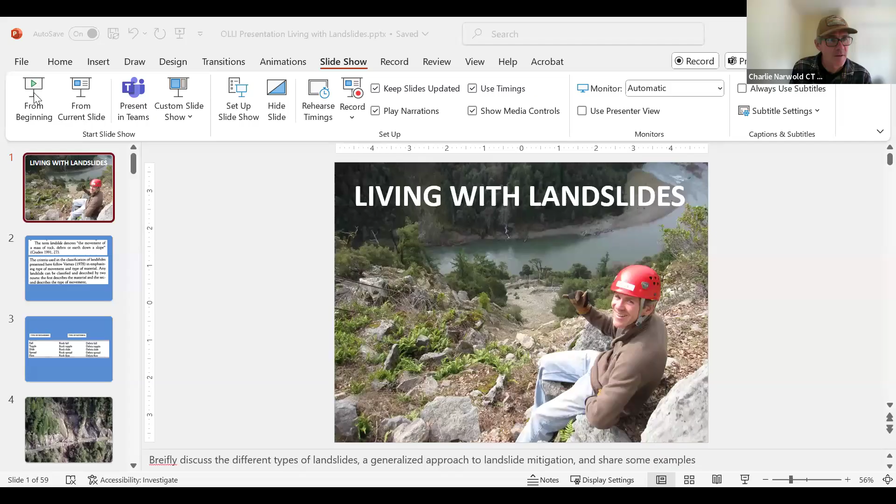Good morning, everyone. See if I can get through the first hurdle here of sharing my PowerPoint presentation. So let's see if we can do that with ease here. So I'm going to share. Give me one moment, please. So let's see. Give me 1 second and share. And let's go here. All right. Does everybody see that? You got it. All right. Whew. That's the hardest part, right? Yeah, we always ask everybody to come on board early so we can make sure the technology is working, because often it's an issue. And Charlie welcomes questions and you can put them in the chat or obviously raise your hand. I will be monitoring the chat. Yeah, feel free to interrupt as needed. Okay.

Well, welcome everybody. Certainly enjoy this opportunity to share some information about landslides here on the North Coast. Some of us are more familiar with landslides than others, but certainly you hear it in the news, and anybody that lives on the North Coast at some point has probably been impacted by a road closure or delays related to landslides. So it seems like it's relevant to folks that live here on the North Coast.

Yeah, and the point in all this is for hopefully people that sit in on this today to learn something. So feel free. I'd like to keep it informal. Feel free to interject. You could just interrupt me. I don't mind. But if you'd rather use the chat, it sounds like Jane might be monitoring that, and she can interject when there's a pause or when appropriate. Yeah, again, I want to keep it informal. I might have to pause a few times. I had the crud last week, so I'm still getting over that. You might hear it in my voice, so I apologize if I have to pause and drink some water every now and again. But I'm glad I was able to participate today.

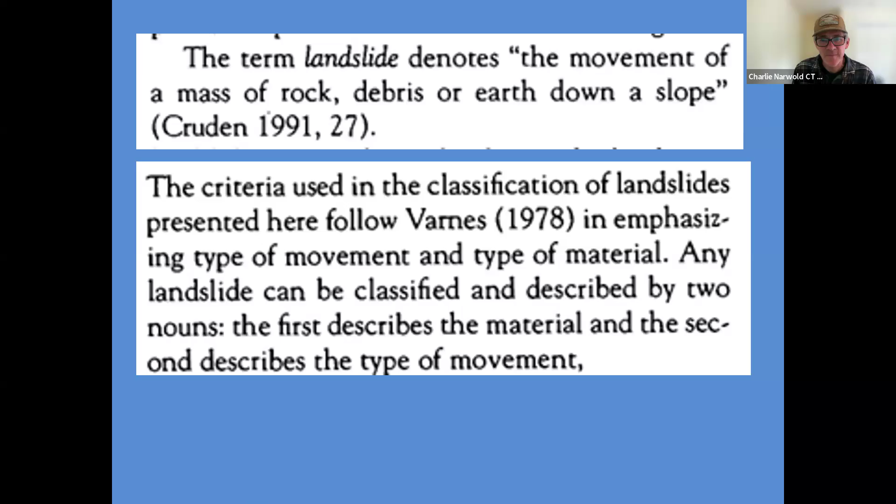Varnes, 1978, came up with one of the more simple classification schemes for landslides. Any landslide can be classified and described by two nouns. The first describes the material, and the second describes the type of movement. So, pretty simple stuff. There are some very sophisticated landslide classification schemes, but in simplest terms, we typically describe them in terms of the type of movement. So is it a fall? Is it a topple? And I'll give examples of each of these: a slide, a spread, or a flow.

So a fall is, if you can imagine a rock comes bounding down the hillside, we call that rock fall. It's falling through the air, and it might intercept the ground surface as it bounces down the hillside. Topple is when you might have rock that is fractured vertically, and there's what's called an overturning moment where the material is actually falling in rotation, and they call that topple. We don't see that very often. That typically happens in rock.

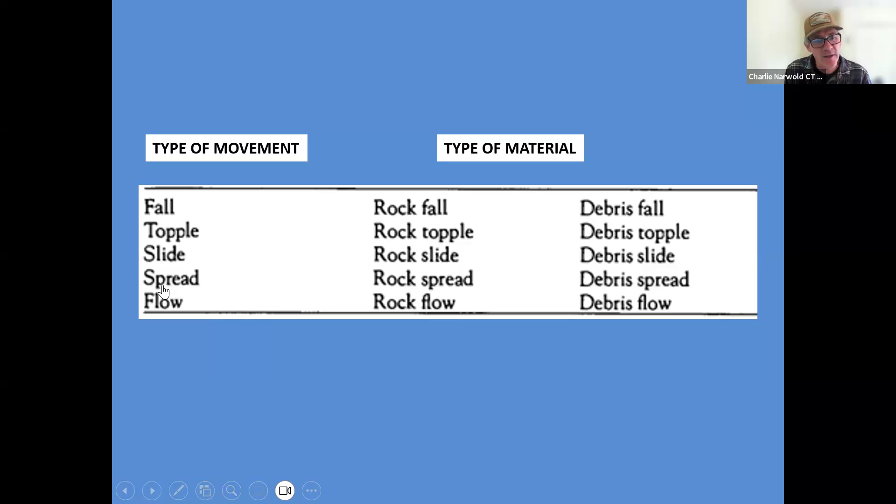Slide, I think, is pretty self-evident. We have a lot of slides in this part of the world, where literally the rock or soil is sliding on some failure surface. That might be the one that people are most familiar with. Spreads are typically where the failure surface of the landslide is very gently dipping or almost flat. Sometimes these happen during earthquakes in saturated material where the land, due to groundwater and other forces, can spread essentially in more of a horizontal sense.

In flow, we also get debris flows in this part of the world, and that's what you often see occurring in Southern California during large atmospheric rivers, where you see these torrents of debris and mud that come flowing through canyons, and they oftentimes occur in recently burned areas. So nothing fancy: the first term is type of movement: fall, topple, slide, spread, flow.

And then just very generally speaking, in this simple classification, is it rock or is it debris? So if it's predominantly rock, you might call it a rock fall or a rock slide. And if it's debris, which again tends to be a combination of both fine grain and coarse material, which is pretty common up in this part of the world. Oftentimes the landslides are comprised of not only soil, but they incorporate a lot of larger boulders in these landslide bodies, and we call that debris.

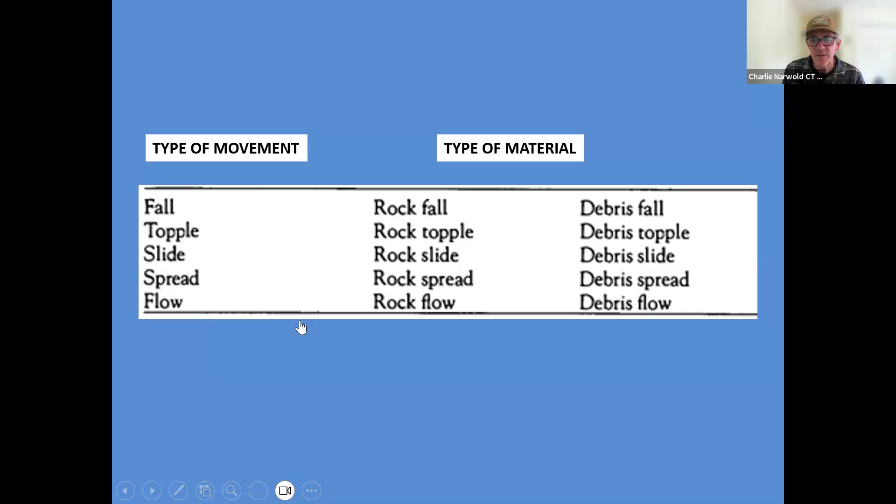So you can get debris slides and debris flows. And so I'd say the ones that we're probably most accustomed to seeing up here are rock falls and rock slides. And then on the debris side, we have debris slides and debris flows, and I'll share some examples. So I was going to try to set this up where we could do a show of hands and do a quiz, but I was pressed for time, so I'll just walk you through these.

And why is this important? At least when you're in the industry and it's your job to mitigate landslides. Because words have meaning. So I think it's important if I was to receive a call from one of our field maintenance people or somebody on my own staff, and they say, Charlie, highway's closed, we have a debris slide. So it's important that I understand the circumstances. And so when somebody says debris slide, I immediately can associate that with the actual landslide. Or if they say, hey, we've got a debris flow, then that has a whole different implication.

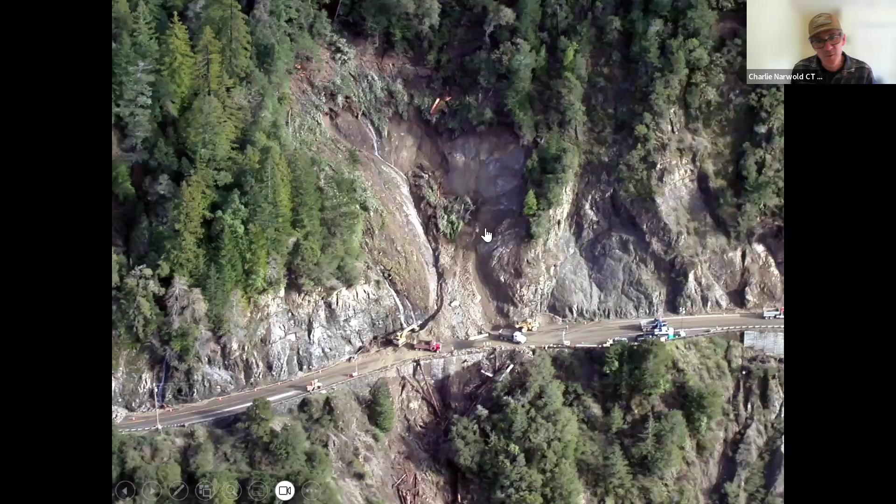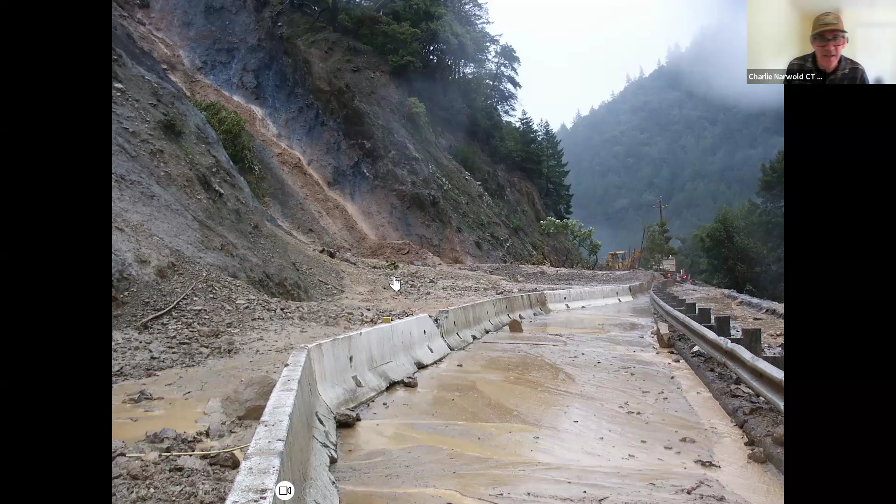So this looks a little different. This is kind of more of a soupy mess. These can be really challenging to deal with. It's kind of a little different beast, as I like to refer to these landslides as beasts that we have to deal with. So this is what we would call more of a debris flow. Some people call these mudslides, but this is where we do have some rock, but this is predominantly finer grain material that's saturated and it flows and it's coming down this. This is out on Highway 96, again, out near Orleans, but this is what we would call a debris flow.

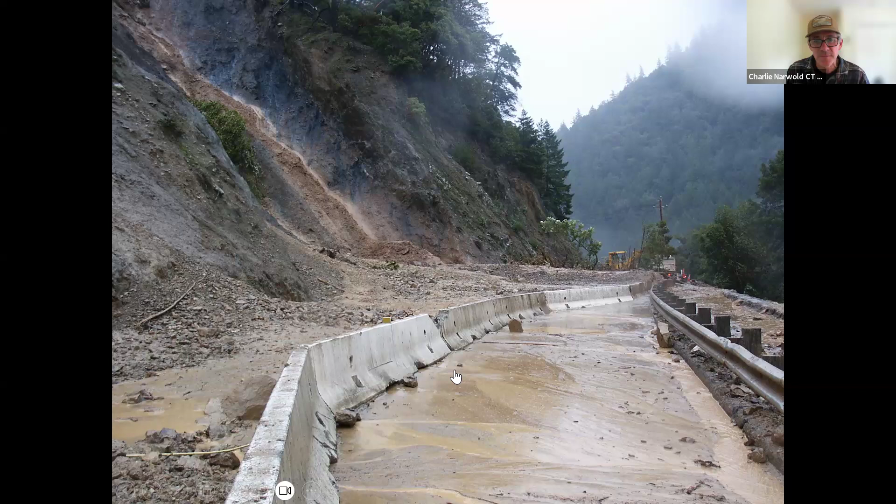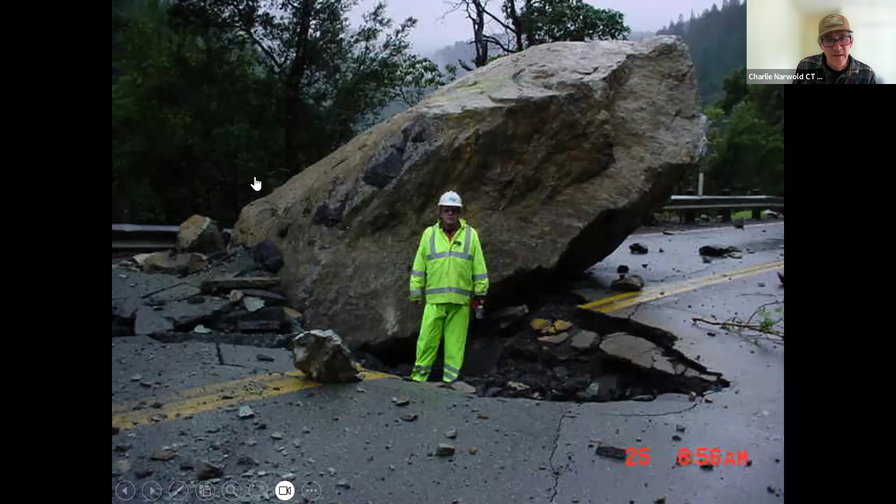It might just help people to understand what those terms mean, and that's kind of what they look like. So this is just a typical block diagram. I might be using some terms that people aren't familiar with. And one size does not fit all. As you can see, there's quite a broad range of situations I just showed, from that rock fall with the large rock in the middle of the lane versus the debris flow, which covered the highway with mud. But I just thought it might help, because we're all trying to learn something new here, hopefully, or learn something that we've already heard in the past.

Oftentimes we refer to landslides as having a head scarp or a main scarp. That's typically where the landslide starts at the top. There's some displacement of the earth that usually results in a large oversteepened scarp at the top. And what the landslide is sliding on or flowing on, we usually refer to as a rupture surface or the landslide failure surface. So oftentimes you might hear me talk about the depth below the ground surface to this landslide failure surface. And sometimes you get intermediate or minor scarps.

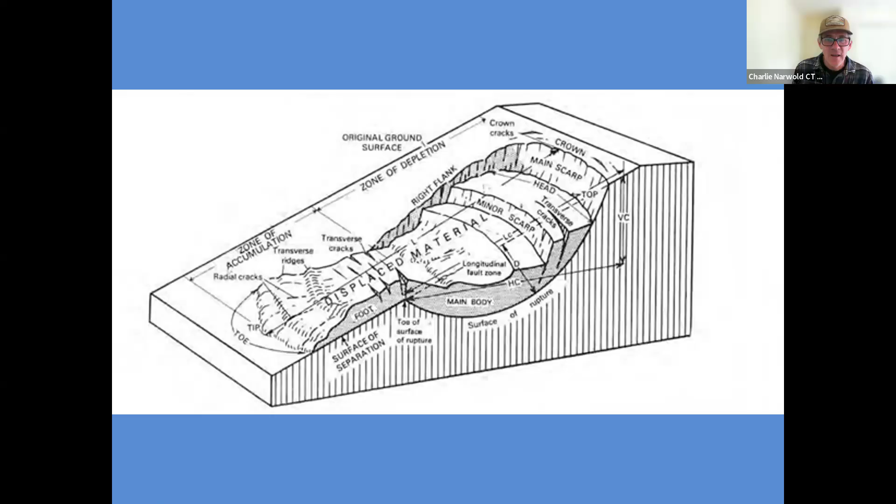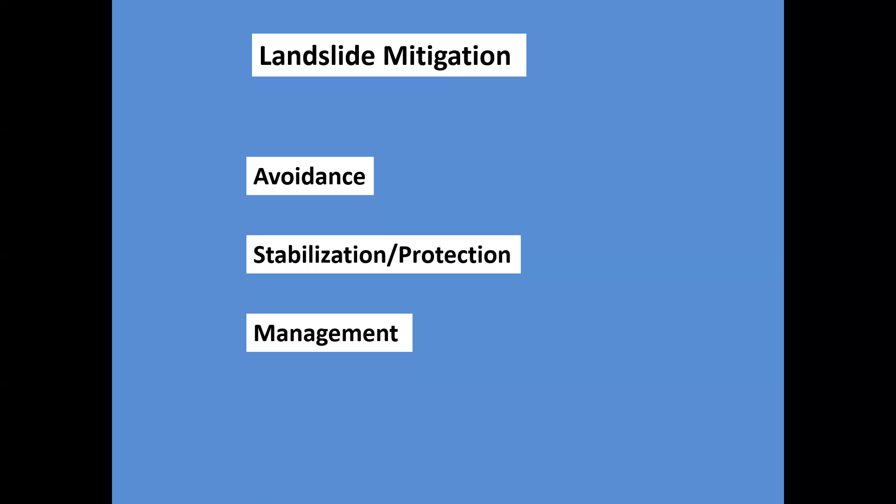I like to tell the story that oftentimes I'll show up on a job site, often when the highway is closed, and either the road has been taken out by a landslide below the highway, or it's completely buried the highway, or it started above, took out the highway, and continued all the way to the river. People are concerned and anxious to figure out what we're going to do. The first thing they say is, "So what are we going to do?" And I always say, "I don't know, I just got here." It usually takes some investigation.

I've been working up here in District 1 for the last 20 years. District 1 is Humboldt, Del Norte, Mendocino, and Lake counties, so that's our jurisdiction, and we get a lot of action in those 4 counties. So the first question is, well, what are we going to do? A landslide occurs, it has impacted our infrastructure, so what are we going to do?

Some people might think it's really complex, and every landslide is different and has its own unique set of challenges. But in order to simplify it, I typically start by telling people we like to approach these in terms of avoidance, stabilization, protection in the realm of rockfall, and then management. It can be overwhelming, but if you start broadly, then you can narrow down your options. We're going to talk about each of these and I'll give some examples.

So what is avoidance? That's usually going to be your best option in most cases. It's usually the most expensive and has the most impacts. But if it's a real bad actor landslide, avoidance is a really great approach. So this is an example in Mendocino County, and this is a great example of avoidance.

This is an aerial view of the South Fork Eel River, and this is where Highway 101 used to be at Confusion Hill, which I'm sure most folks on this call are familiar with if they've lived here prior to around 2005. This was a stretch of Highway 101 that has a large landslide complex.

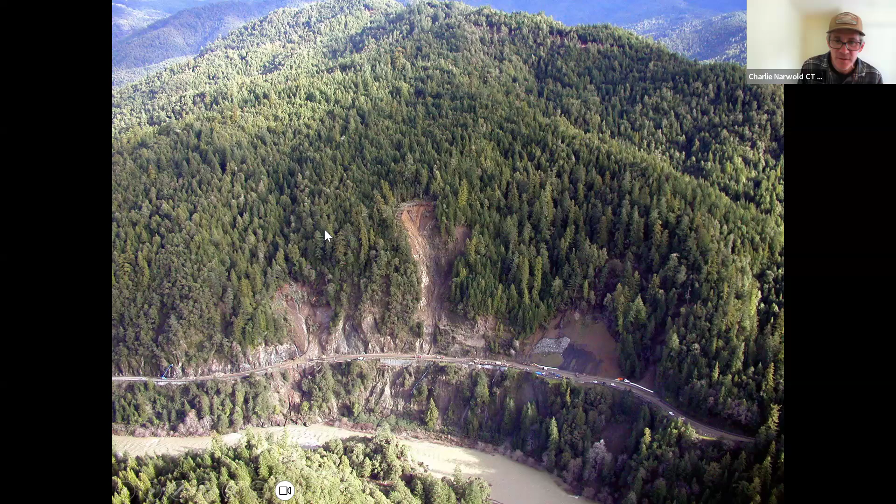Oh, and here's just a picture. This was common at Confusion Hill for many years. We'd have this K rail in place, and these are posts of a rockfall fence that got bent over. You can see one of these shower curtains, as I like to refer to them, what we call a cable drape, which is a big heavy cable drape that's draped over the slope to try to mitigate rockfall coming off

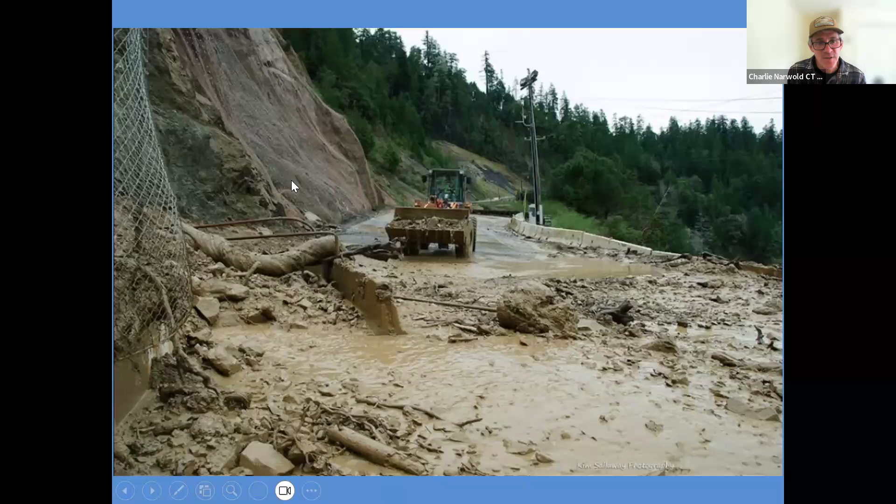the hillside above. So despite our best efforts, protection measures, it wasn't futile, but usually they would be overwhelmed, and this was a common occurrence. And so stabilization and protection along the existing alignment just wasn't really an alternative. So Caltrans decided, with the help of Federal Highways, that it was time to find a long-term solution to Confusion Hill.

So we had a giant landslide that caused us all kinds of grief. I can't tell you how many times myself and my family and probably all of you got stranded on one side of this trying to get to the Bay Area over the holidays to go catch a flight or visit family or coming back from a trip, and you'd end up having to go through Bell Springs Road on some awful detour in the middle of the winter.

So this is just a classic example of avoidance. We had a landslide that was causing us a tremendous amount of grief. It cost an enormous amount of money, and there were also the safety concerns to maintain this section of highway. And the decision, which was not an easy one, and it took decades to develop this mitigation strategy, was avoidance. So there's a great example of avoidance.

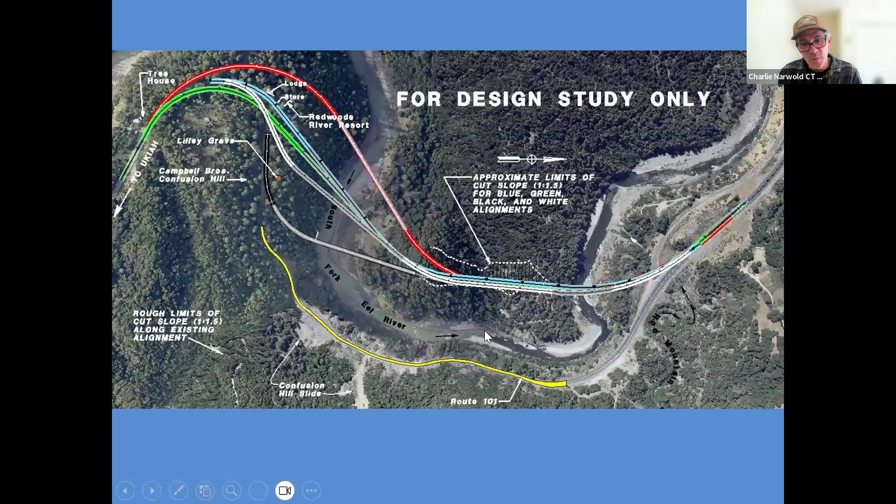So this avoidance measure was designed and built, I think we started in 2006, and it took about 3 or 4 years to complete. But here we are in 2025, and we're talking about doing a bypass, avoiding the Last Chance Grade landslide. And that's supposed to go to construction, I believe, in 2030. So history repeats itself.

And Jane, I'm not looking at the chat, but does anybody have any questions at this point? Yeah, John Clark mentioned they moved here 18 months ago around Elk River Road.

They're on a very steep hill with sheer slides. Is there an entity that could evaluate the chances of a landslide and recommend mitigation? In other words, does the state do that? Do you do that? Yeah.

So Elk River Road, I believe that's probably outside of Eureka city limits, but it's probably within Humboldt County jurisdiction. I'm just guessing, but I was just out there for a mountain bike race this past weekend, out on Elk River Road. And I'm guessing that falls under the jurisdiction of Humboldt County Maintenance.

And they certainly have some battle-hardened people that work for the roads department for Humboldt County in terms of being proactive and being able to do an evaluation and come up with slope stabilization measures. I know, as we all probably live here in terms of paying our taxes, that a lot of their funds come from tax revenue, so they're pretty strapped for funding.

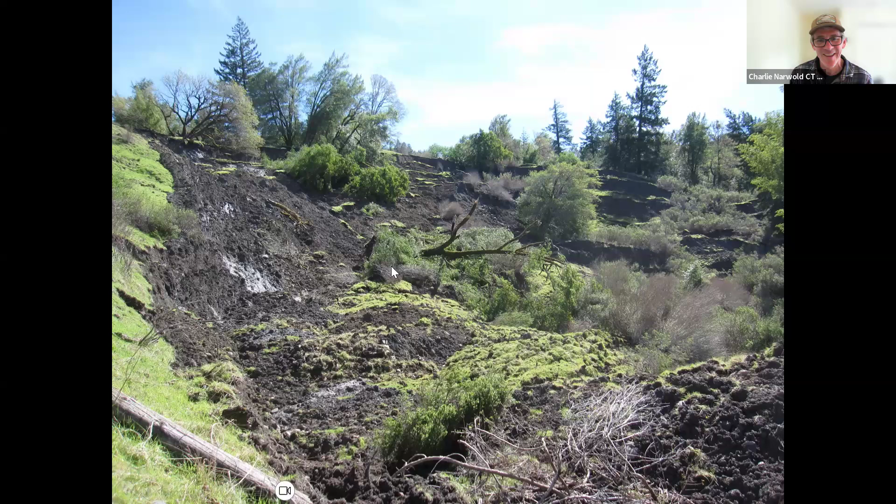And so the idea, and this is just what it's shown on paper, is that we were going to excavate the toe of the landslide, and then we were going to dig below the failure surface, and we were going to put back material, essentially rock, and we were going to compact that material to where this kind of trapezoidal shaped piece of real estate that we were going to build was going to basically hold back, or what we would call a buttress.

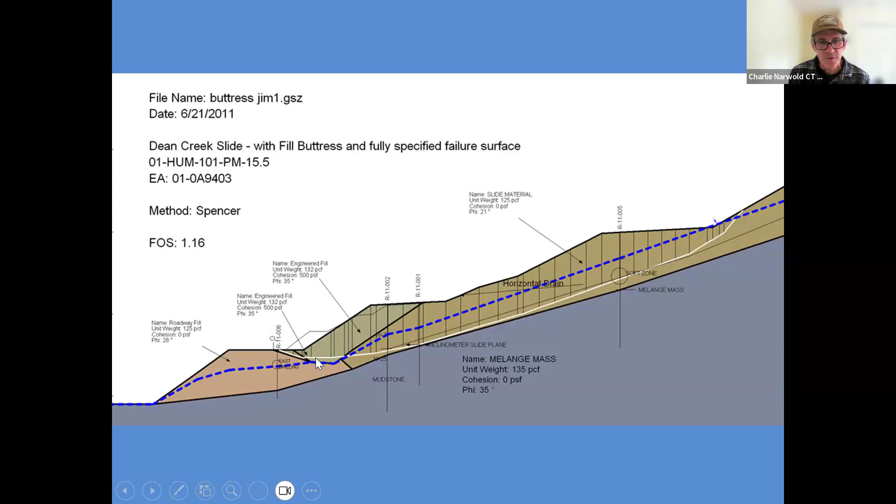We were going to buttress the landslide. And so that was the idea here. This is a zoomed in portion. So here's this buttress, and we'll see some pictures of that. So that's just kind of that area zoomed in.

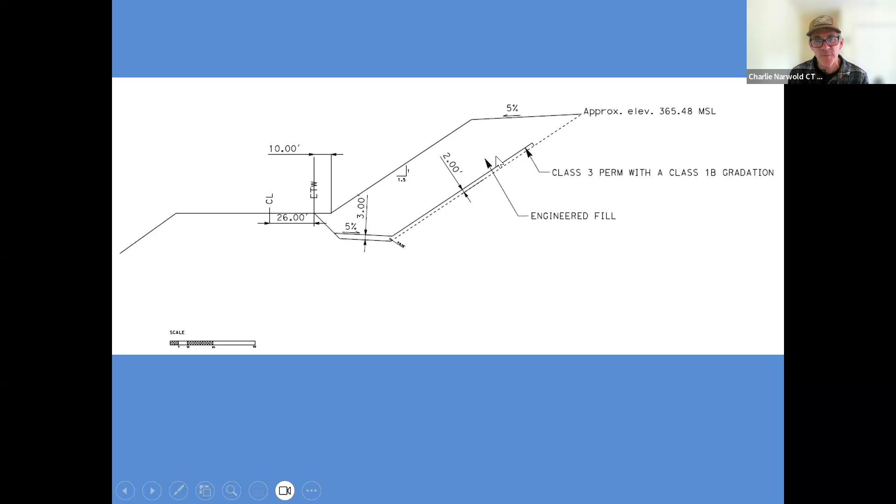So we were going to come in with a contractor. We're going to excavate the toe of the material, and we use the expression keyed in below the failure surface. So this will be below the landslide failure surface. And essentially this, in conjunction with some dewatering of the landslide, was going to, at least based on our slope stability analysis, stabilize this landslide.

So here's the big hole in the ground. Now we've got our backs to the hillside, we're looking out towards the river. And this is the excavation that we performed. And the idea was that we would put back heavier material that was more dense, because of its engineering properties, had enough strength that it would buttress the landslide.

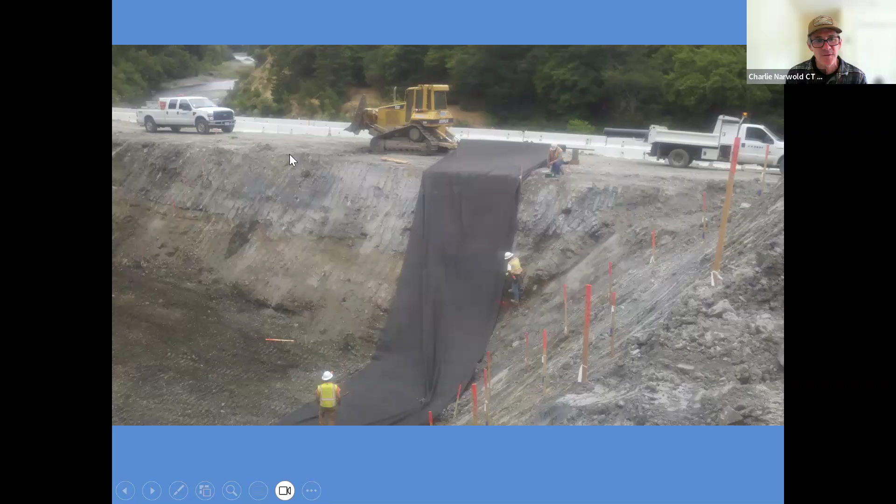So here we are now looking to the north, the highway's on the left, the landslide that we saw in that aerial photo goes up the hillside on the right. And we're bringing in this crushed rock material, which is heavier and stronger than the landslide material, and therefore would afford us this ability to buttress the landslide.

One thing that I'll say is that when we dug this excavation, the landslide actually accelerated, which we expected. So we ended up working two 12-hour shifts, or the contractor did, and this was all monitored, meaning we had real-time monitoring, and we knew the depth of the failure surface. And once we excavated below it, we saw an acceleration in the rate of the movement of the landslide.

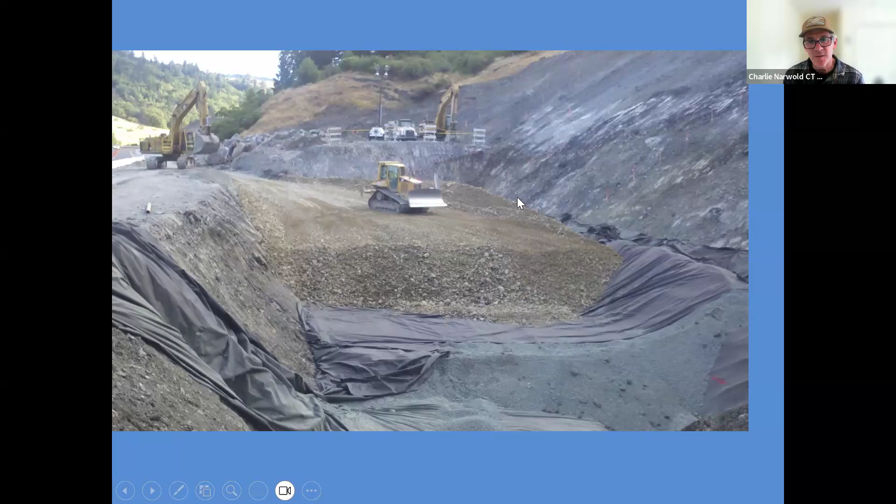And that's when we went to this 24/7 operation and promptly put this material back as fast as we could, because we didn't want the landslide to fail into the excavation, due to contractor safety. But once we piled this material back up, the landslide stopped. There was a little bit of excitement.

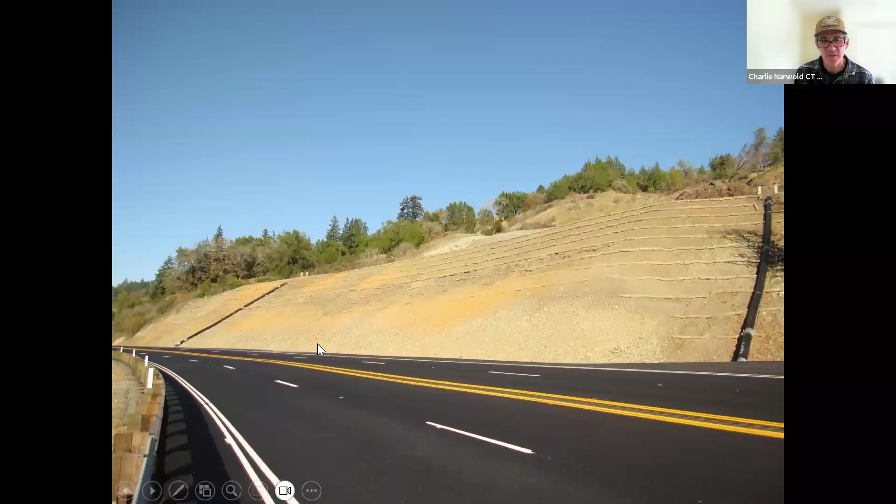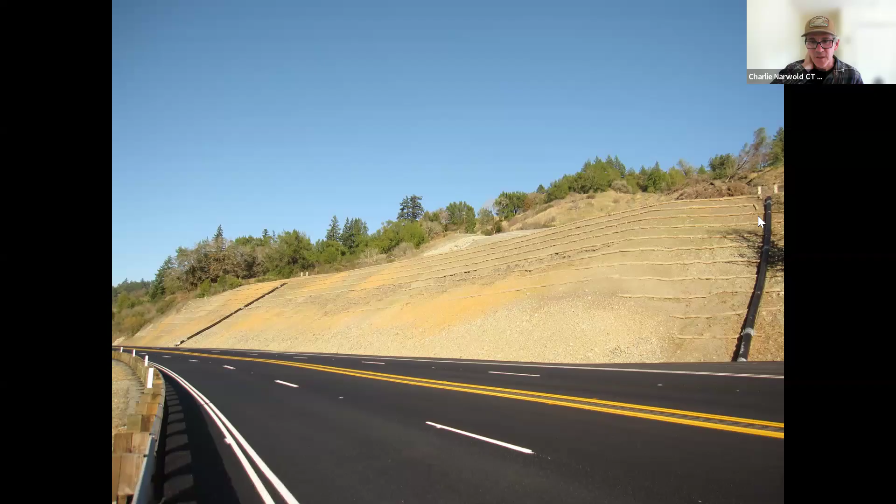Yeah, so this is this big buttress. So now people probably whiz by this 4-lane section, and hopefully not on their cell phones. They're doing 65 and they don't even know this is here, but this big, kind of inconspicuous mass is a buttress that's holding back that landslide. So that's an example of stabilization.

And let's see, 12:50. I think we're doing pretty well here. So drink a little water. You have until 1:30, Charlie. Yeah. But there are a couple of questions.

Where is the material removed from the landslide taken is one, and have you adopted quadcopter drones for surveillance? And could you talk about sinkholes? That's 3 different questions. Sure. So the first one was, where do you haul the material? Yeah. Anywhere we can.

That can be an enormous challenge, and it can be an enormous expense. And in this part of the world, you need to really look carefully at our disposal sites, because when you start moving hundreds or thousands or tens of thousands of cubic yards, in the case of Confusion Hill, which was about 500,000 cubic yards, when you try to find a home for that, you have to make sure it's in a stable location so that you don't create new landslides or instabilities as a result of placing it somewhere else that's potentially unstable.

So we work with private property owners. Sometimes depending on the nature of the construction contract, it becomes the property of the contractor. So it might sound like I was being a little flippant when I said anywhere we can take it, but literally, sometimes if it's rocky material, the private timber industry is interested in it because they can reduce it in size and use it to rock their logging roads.

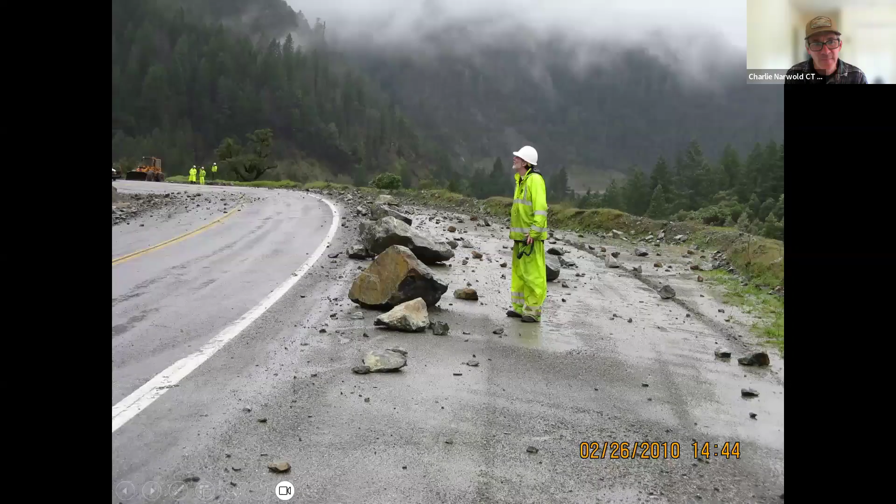So I'm going to take you back to Highway 96. That's definitely a tough neighborhood out there. So this was an existing cut slope, a slope that had been excavated to build the original highway. Maintenance started noticing not a little bit of rock, but a lot of rock on the highway. Pretty significant. And here's a picture of what the inboard ditch looked like. So, major safety issue, right? So not a good situation. I don't expect everybody to read all this, but I'll just run through it quickly. It was really more for me, but basically,

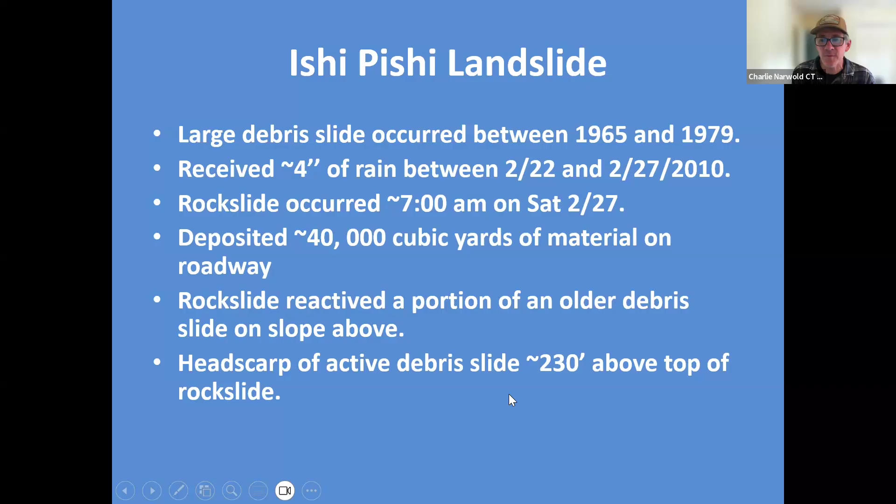we received 4 inches of rain in about 5 days back in 2010. And then we had a rock slide occur around 7 a.m. on a Saturday morning, and it deposited about 40,000 cubic yards of material on the roadway. And then the rock slide reactivated, meaning there was an older landslide above it that became active as a result of this. And the headscarp of this other slide was 230 feet above the rock slide. So this was, again, show up and what are we going to do? It's like, I don't know. It's a tough one.

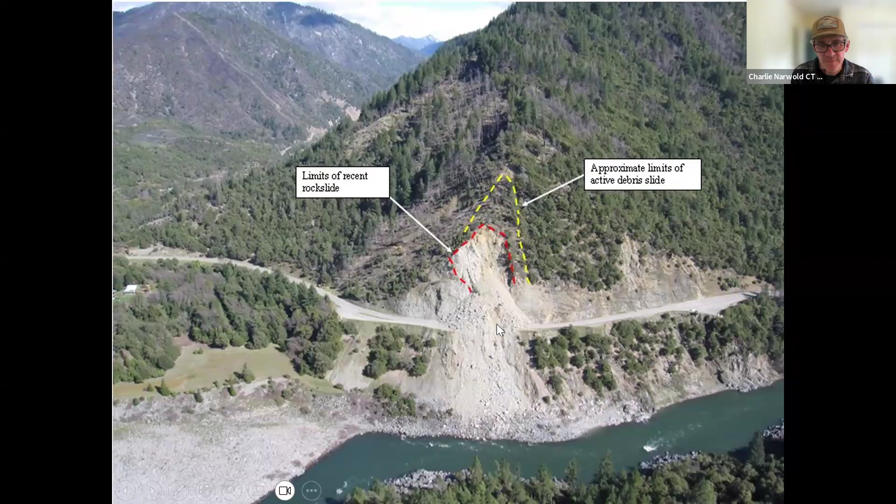And this is just zoomed in. I think I've referred a couple times to the headscarp. So this oversteepened area here, this white, there was an existing scarp there, and as a result of the rock slide in red, a portion of this older landslide reactivated.

So, long story short, we monitored that slope for a long time and convinced ourselves based on the data that the landslide above the rock slide had really moved in response to the rock slide, and this was now stable, but we still had this pile of rock on the roadway and this steep, recently failed slope to contend with.

There were also some cultural considerations. This is out on Highway 96, so there were some cultural considerations. We had this marginally stable piece of real estate on the hillside above. We weren't going to build two bridges to go onto the opposite side of the river. It just wasn't possible at this location. So stabilization was probably not really an option, nor was avoidance.

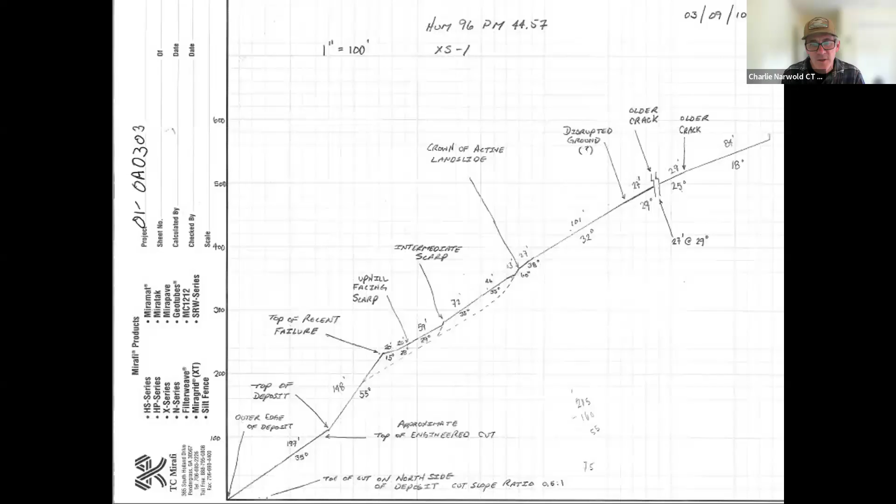And you can appreciate, this is some pretty tough terrain here, and this is not something you want to be running traffic under. So that's a cross section, which I'll skip for now. But we monitored the site.

We also use survey prisms. So we actually monitored this slope during all these activities because we didn't want anybody out there working underneath this slope if it was potentially still active. I didn't really touch on that today, but there's all these things that we have to do to ensure the contractor's safety to try to mitigate these landslides. So we had monitoring survey points that we could read from the opposite side of the river with a total station.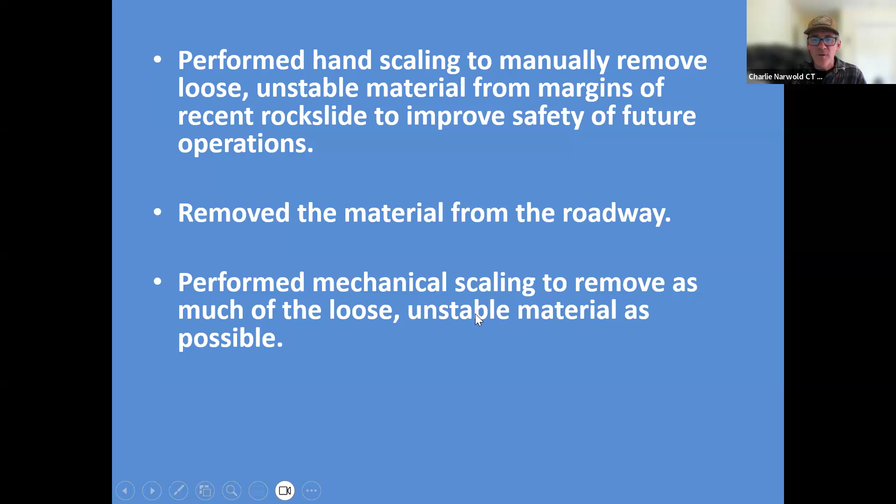But we decided that the best approach would be to remove as much of the loose, unstable material as we could, remove the material from the roadway, but we were still going to have a rockfall issue, so we needed some protection. So this is what's called hand scaling. So we hired a specialty contractor that actually went out and removed some of these rocks by hand, believe it or not. Here you can see some vehicles down here on the road for scale.

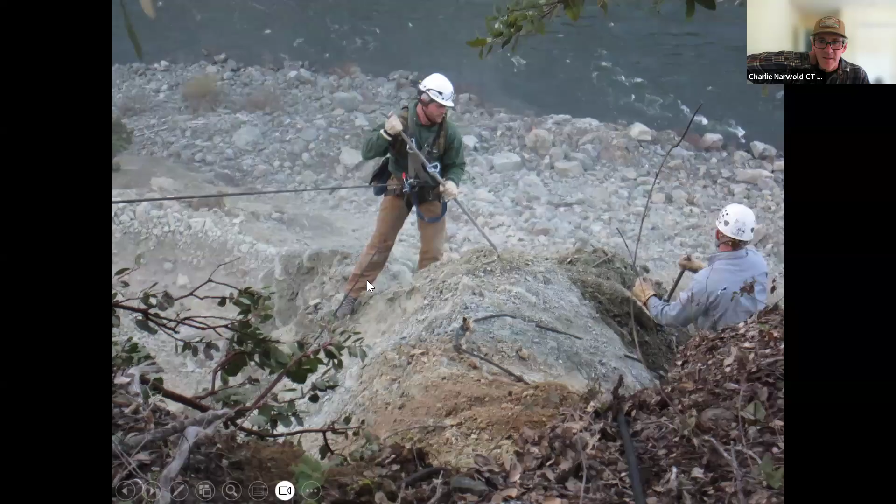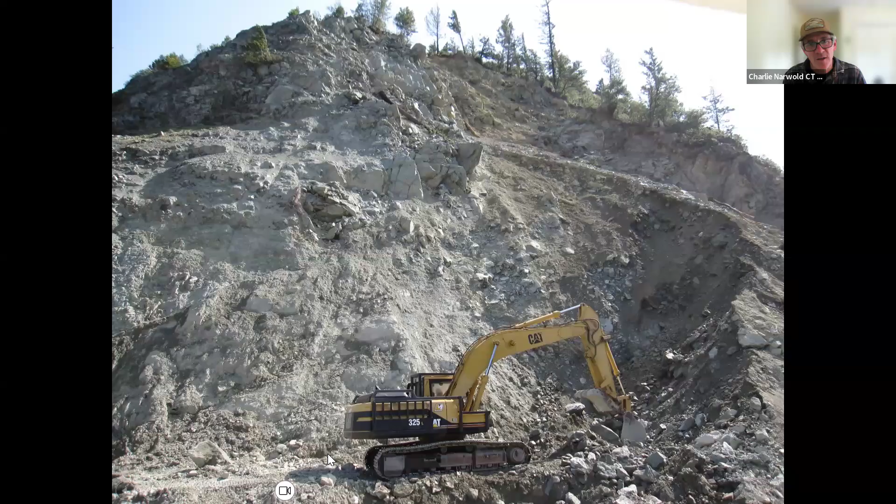So yeah, this outfit that we hired specialized in what's called hand scaling. It's very labor intensive and very time consuming, and it's dangerous, but we take precautions. So there's hand scaling. We remove the material from the roadway using excavators, but you can see how ugly this slope is still above the highway. More material on the road.

So we actually used a logging technique, using an excavator and cables to drag what we call the shark up and down the face of the slope. So this is an I-beam that's made out of steel with a bunch of teeth that are welded to it. And I'm just demonstrating this so you can see that there's a whole system of cables, using a yarder from the logging industry, for people that might have been loggers.

And we literally dragged the shark back and forth and kind of raked it across this slope. And this is what came down as a result. So we're trying to basically remove as much of the unstable material as possible. So when we were done with the hand scaling and excavating the material at the roadway and using the shark, this is what it looked like.

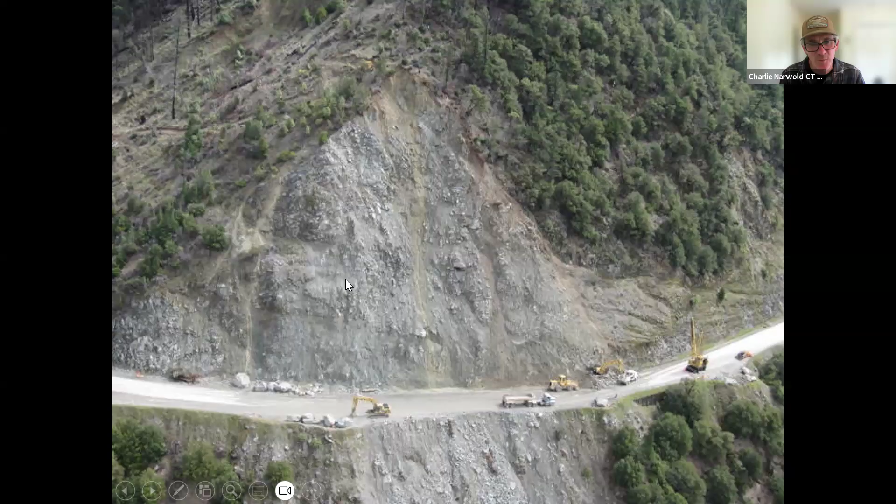So we decided we were going to go with what we call protection. And that's really what this example I wanted to share is, that we did take steps to stabilize the slope as best we could, but really the main point was that we were going to protect it. And this is what I call these shower curtains. So we have what we call a cable mesh, which is like a shower curtain that we place over the slope, and then it's suspended by, in this case, suspenders and cable anchors at the top.

And then as rockfall is generated behind this, it is conveyed below or behind that shower curtain, and it controls the trajectory and the velocity and the energy of that rockfall to where it can be managed at the roadway level. It gets spit out behind some K-rail, and I'll show you a picture of that. So this was our idea.

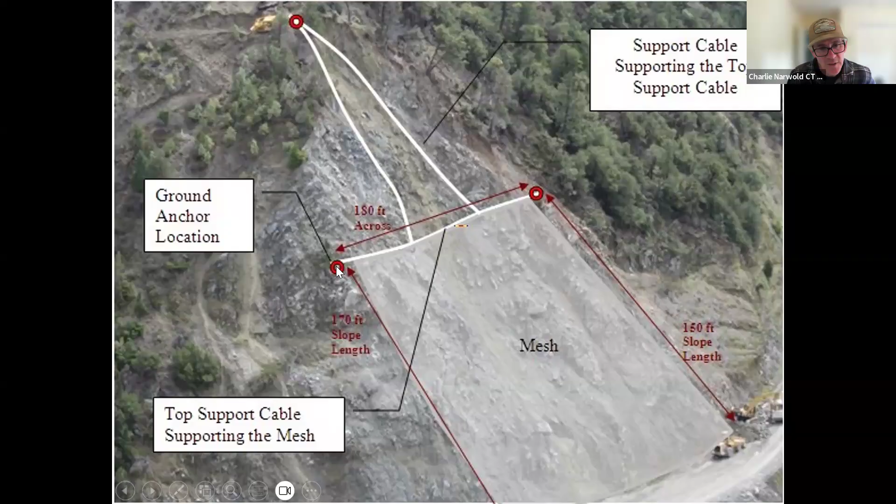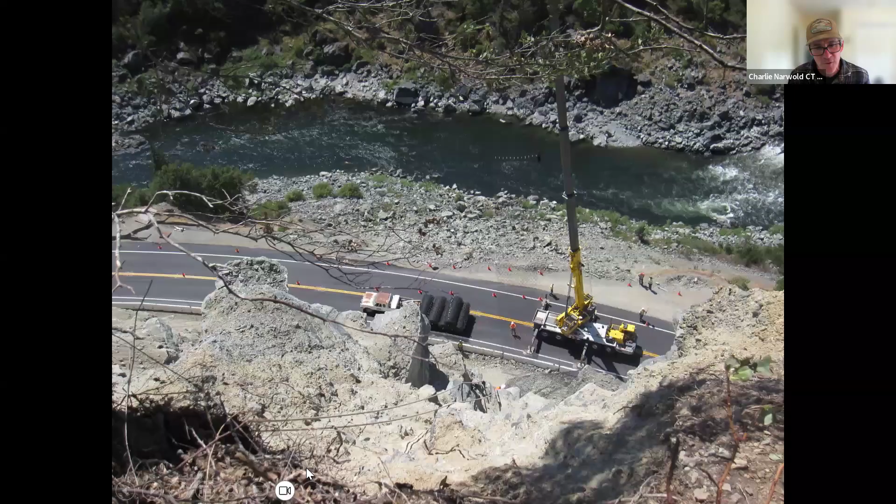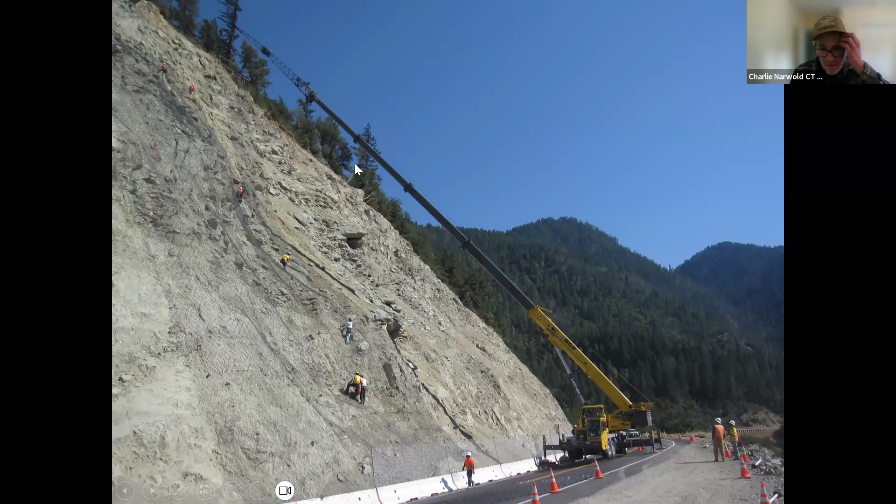So this is a view from the top looking down. Here's a view from the roadway looking back up. They're hanging these panels, and then there's people that rappel down and stitch these panels together with lacing cable. So we have a nice big continuous, there's another picture, but you can imagine the expense and the effort to do this work. And then when we're all done, the lower portion of this slope is covered with this cable net drapery system.

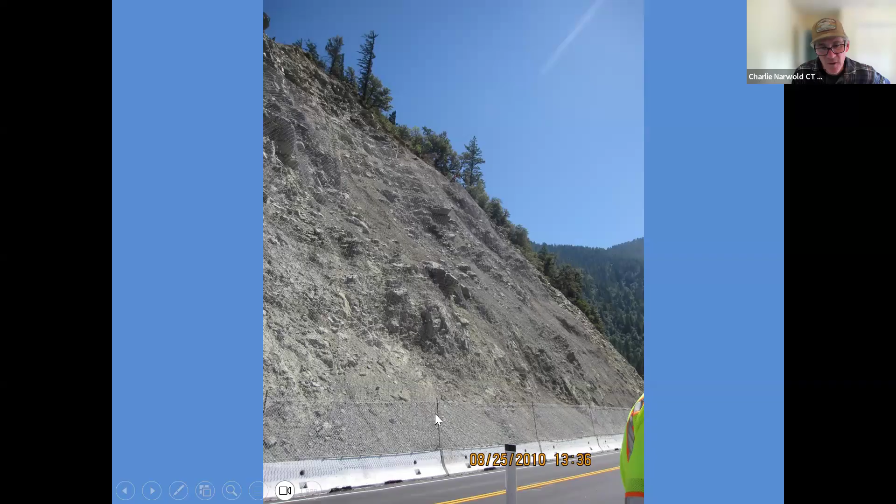And then we have K-rail at the toe, some people call them Jersey barriers, but it's this steel concrete barrier. And then we have what we call a little catch fence. And periodically maintenance comes over, and we have a little mini excavator that crawls around behind here and loads the stuff out. But that was an example of protection.

Oh, and I guess I got one more. Management. Did I? I guess I didn't. How much time I got? Well, just keep going as long as people want to hear you, you can keep going. Okay, yeah, well, here you go.

So management. I guess I forgot about management. So management: sometimes with landslides, we can't avoid it. It's really not feasible to stabilize. And in some cases, it's really hard to protect. So what do you do in those situations? It's still our responsibility to keep the highway open in a safe manner. Sometimes it's a combination of stabilization, protection, and avoidance, but we're actively managing a site.

And so this is out on Highway 36. This picture was just taken recently from a drone. Somebody asked about drones earlier. Some of you may be familiar with this landslide. It's about post mile 15, before Bridgeville, but this is a menace. It's very long in terms of the slope length.

It's very steep. And what you don't see in this photo is that the headscarp, remember the pictures I was showing you about the headscarp, is well up into these trees. And the concern is that if we came out here and tried to remove this loose material, it's so steep that we would just undermine or destabilize the hillside above. So we're very concerned about trying to remove the failed material of this landslide.

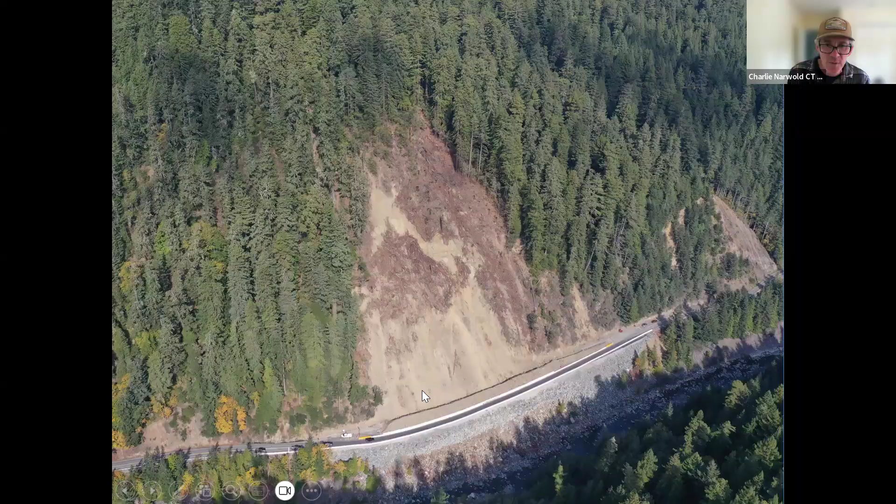So this is avoidance. We're basically trying to avoid the problem by realigning the highway, and then we're trying to protect the highway by building what we call a large earthen berm. Let's see if I got a picture of that. So here's a cross-sectional view. You have the river on the left, landslide on the right.

The highway used to be, you see where this yellow tree is in the center of the photo, right at the base of the slope. So it was probably 30 to 40 feet further to the right. And so anytime material came off this slope, it was immediately into the roadway. So we basically realigned the highway towards the river, pushed a single lane out towards the river, and built this large earthen berm using the materials that we have on hand.

And so this was after the first significant rainstorm the week before last. We were able to maintain traffic throughout that entire rainfall event, and all the landslide debris was contained within the catchment area behind this earthen berm. And I'm saying management. This site requires a lot of management.

So the first clear day we had, this past Monday, we had an excavator out there basically removing all the material that had accumulated in the ditch. And I just got a call this morning that with last night's rain, the ditch is now filled up again. Fortunately, tomorrow we have a good forecast, and they're going to be back out there tomorrow cleaning out this catchment area. So when I said management, this site is being actively managed by Caltrans right now. Yes, we have this protection in place. We tried to avoid it, but

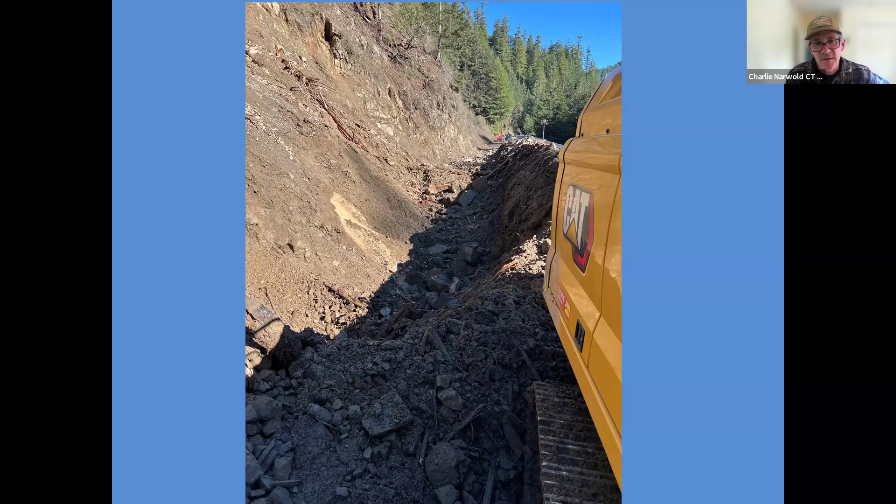Charlie, one last question. Bruce, we have all been watching the construction of the Indianola overpass. The side slopes look pretty steep. Can you explain the planning that went into preventing the side slope from sliding in the rainy season and their use of these big blocks of styrofoam?

Yeah. Okay. Good question. So maybe I'll start with the styrofoam. So, well, maybe not obviously, that intersection is in the middle of Humboldt Bay. As many of you may know, Humboldt Bay used to extend much further inland. It was diked and drained to create grazing land for cattle, is my understanding.

But, for all intents and purposes, that Indianola intersection sits in the middle of Humboldt Bay. So the soil beneath that intersection is predominantly clay, very soft, very squishy, very low strength. And I'll get to the EPS, the expanded polystyrene blocks. So the bridge itself is on very deep piles. We had to go extremely deep to get enough support for that bridge in this

clay material. And then we have this very large approach fill or embankment that obviously is required to get up to the top of the new bridge. We use the term isolate. What we didn't want to have happen is the load from the embankment having any influence on the foundation for the bridge.